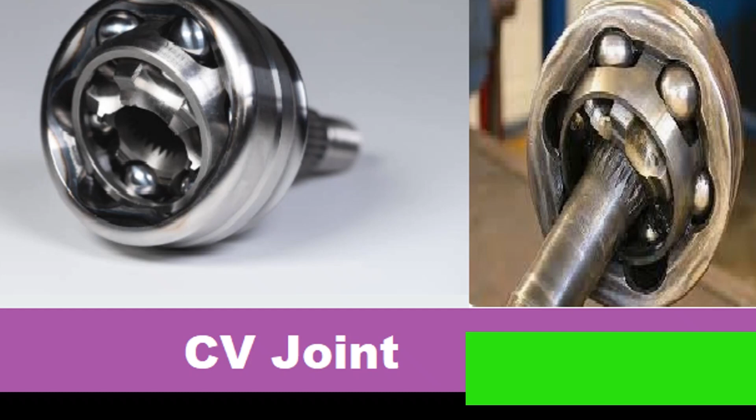Hello everyone and welcome to today's video where we discuss the symptoms of a worn CV joint and CV boot and how to replace them.

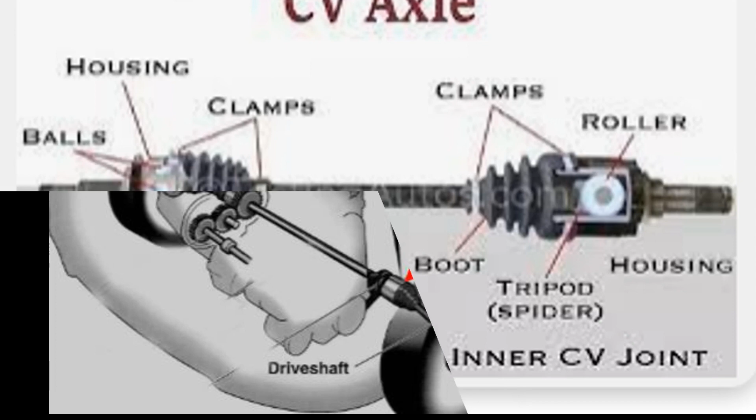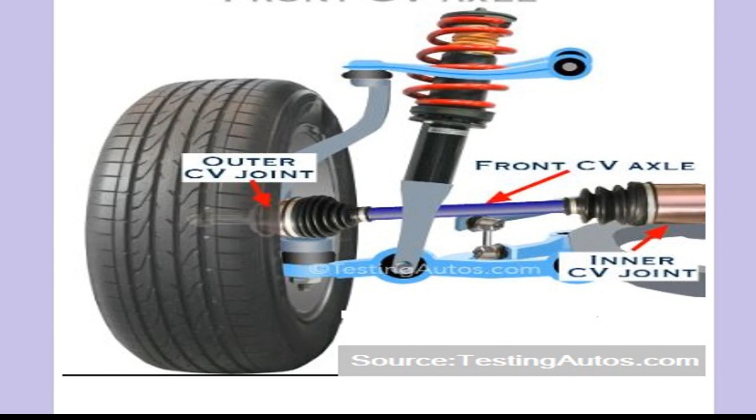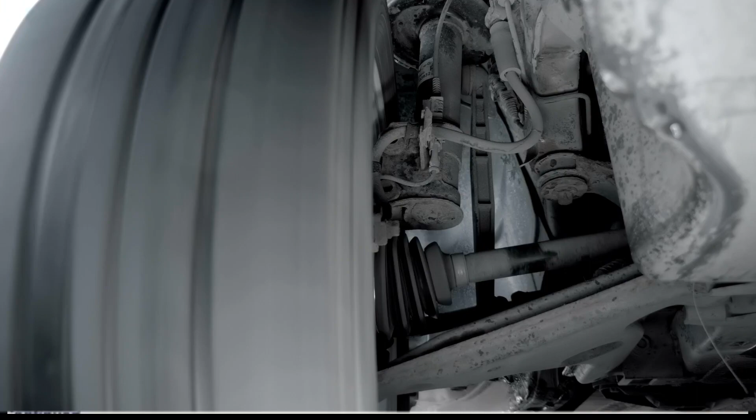What is a CV axle boot and how does it work? A CV axle is a component of front-wheel drive and all-wheel drive vehicles. Also known as half shafts, these axles transfer power from the transmission or transaxle to the wheels. An individual axle is made up of a short, solid metal shaft with a special joint, the constant velocity joint, at each end. These joints allow for all of the up, down, in, and out movement of an independent suspension.

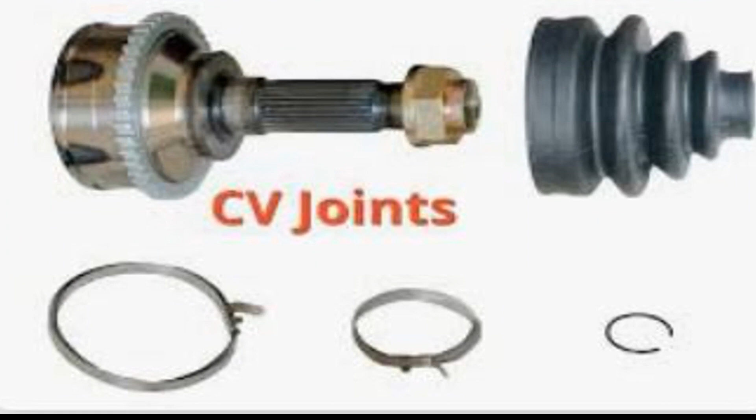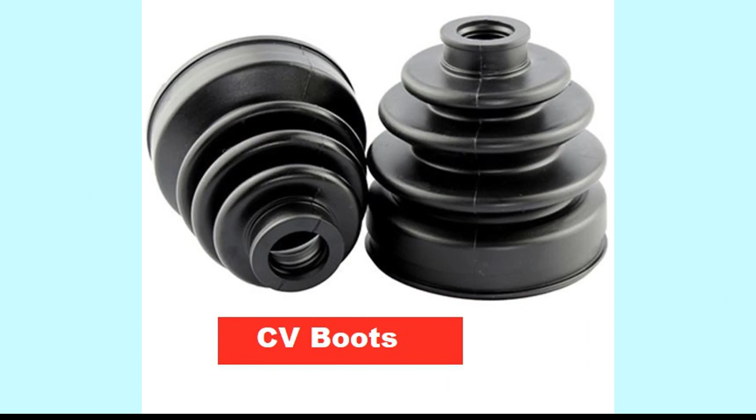What are the CV boot and CV joint? A CV boot is a protective cover that surrounds the constant velocity, CV, joint in a vehicle's drive shaft. It is made of a flexible rubber material that helps to protect the CV joint from dirt, debris, and other contaminants that could cause damage or premature wear.

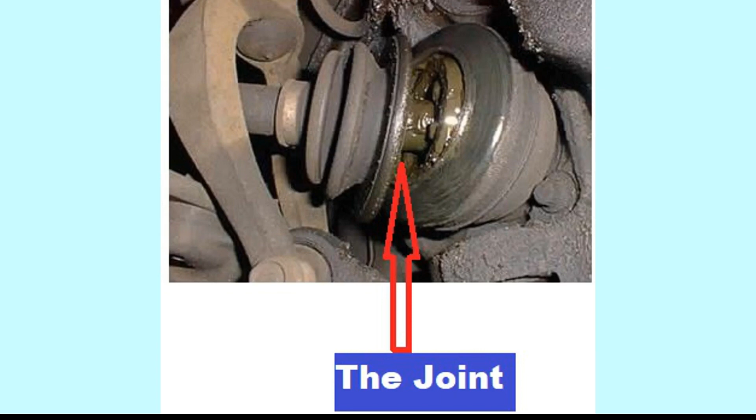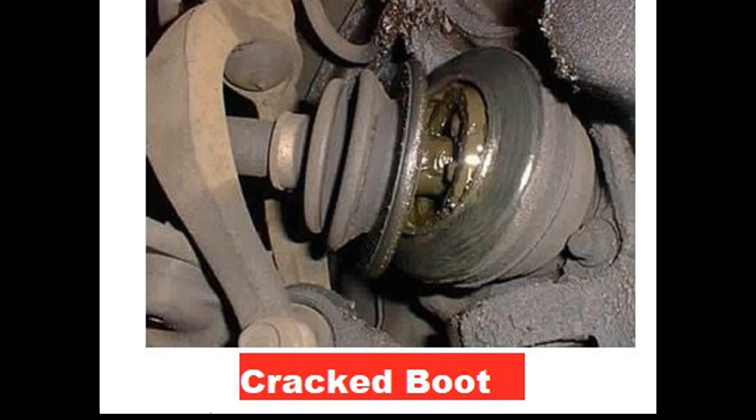The CV joint is responsible for transferring power from the transmission to the wheels, and the CV boot helps to ensure that it remains lubricated and protected, which helps to prolong its lifespan. If the CV boot becomes damaged or worn, it can lead to a failure of the CV joint, which can be expensive to repair. Now we will see the top 5 noise symptoms with a worn CV shaft.

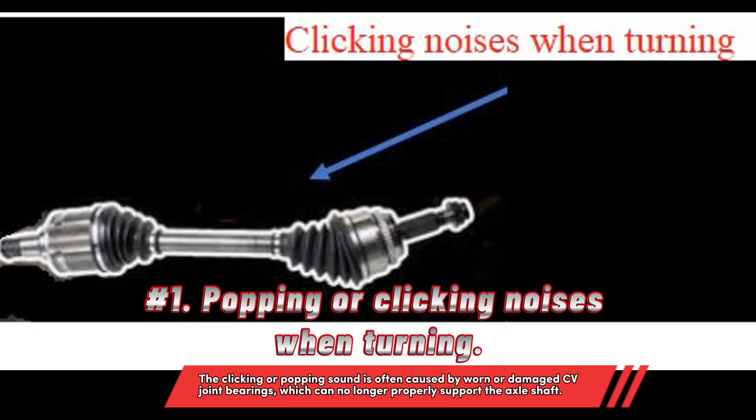1. Popping or clicking noises when turning. This indicates a worn or damaged outer CV joint. To verify this condition, place the vehicle in reverse, crank the steering wheel to one side and drive the vehicle backward in a circle. Check the rearview mirror first. If the noise gets louder, it confirms the diagnosis and the need for a new replacement CV shaft assembly.

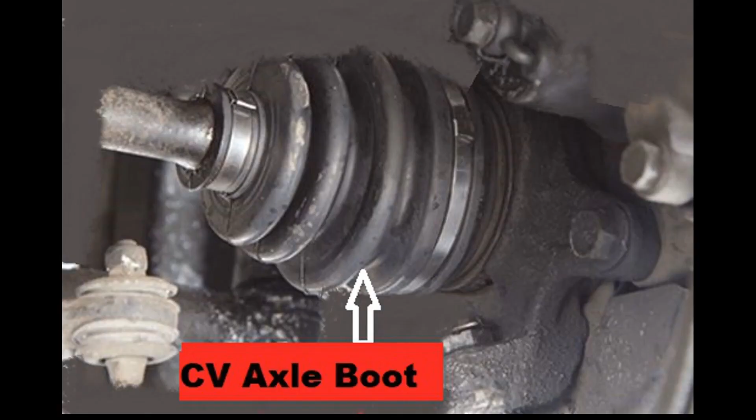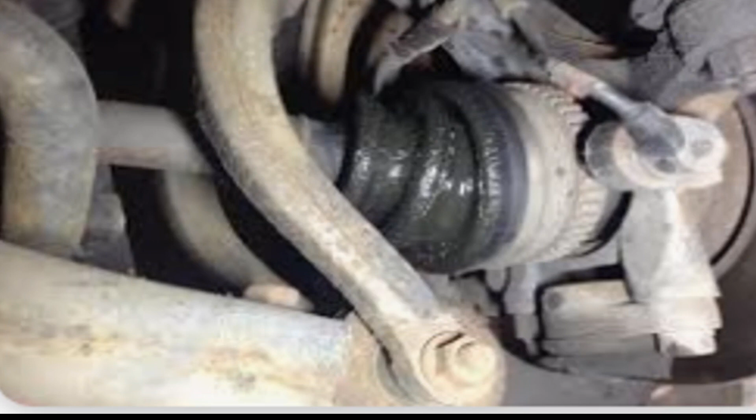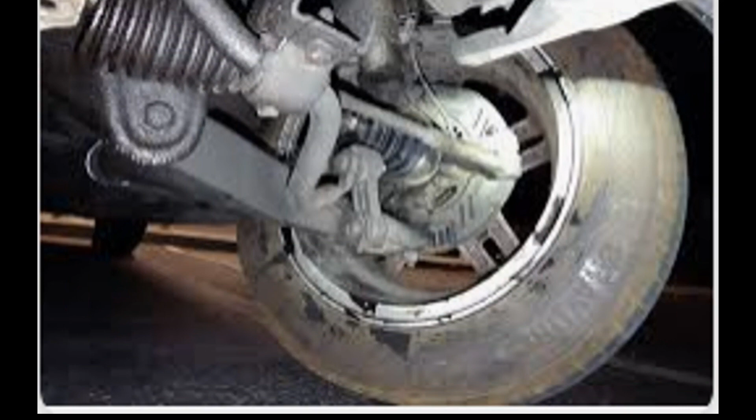2. A clunk when accelerating, decelerating, or when putting the transaxle into drive. The noise comes from excessive play in the inner joint on FWD applications, either inner or outer joints in a RWD independent suspension, or from the driveshaft CV joints or U-joint in a RWD or AWD powertrain. To verify the condition, back the vehicle up, alternately accelerating and decelerating while in reverse. If the clunk or shudder is more pronounced, it confirms a bad inner joint.

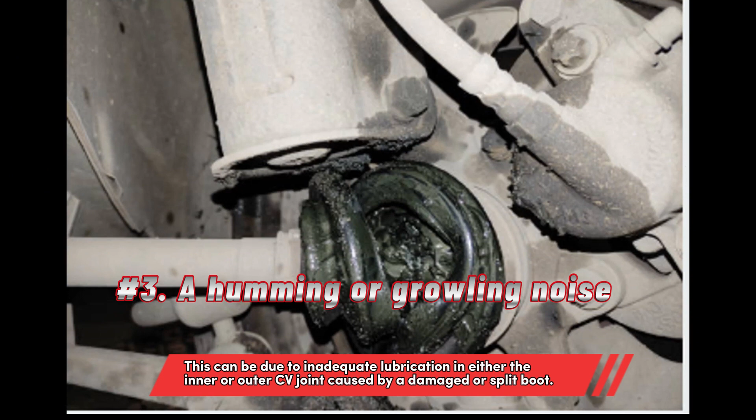3. A humming or growling noise. This can be due to inadequate lubrication in either the inner or outer CV joint caused by a damaged or split boot. However, this symptom is more often due to worn or damaged wheel bearings, a bad intermediate shaft bearing on equal-length half-shaft transaxles, or worn shaft bearings within the transaxle.

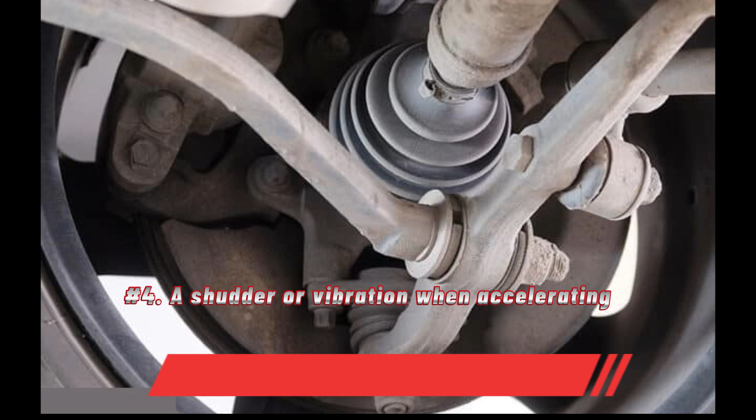4. A shudder or vibration when accelerating. This may be caused by play in the inboard or outboard joints, but the most likely cause is a worn inboard plunge joint. Similar vibrations can also be caused by a bad intermediate shaft bearing on transaxles with equal-length half-shafts, or by bad motor mounts on FWD vehicles with transverse-mounted engines.

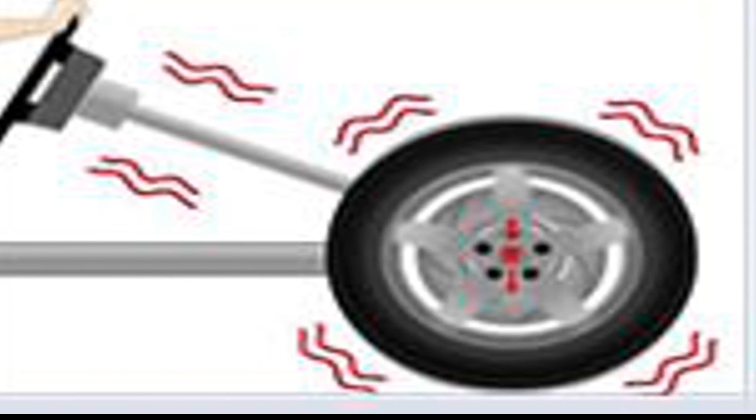5. A vibration that increases with speed. Note, this symptom is rarely caused by a failing CV joint. An out-of-balance tire or wheel, an out-of-round tire or wheel, or a bent rim are the more likely causes.

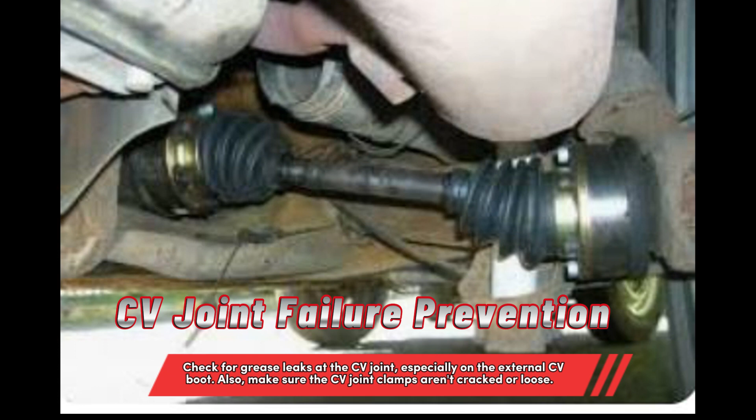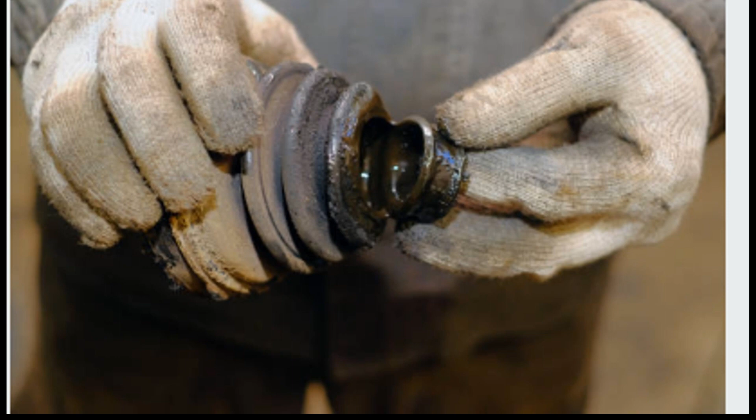CV joint failure prevention. Check for grease leaks at the CV joint, especially on the external CV boot. Also, make sure the CV joint clamps aren't cracked or loose. Visually examine your CV joints for wear, ripping, cracks, or other damage to the boot on a regular basis. Early detection of possible faults can save money on repairs and prevent more significant damage to the vehicle's driveshaft, wheels, or entire CV joint.

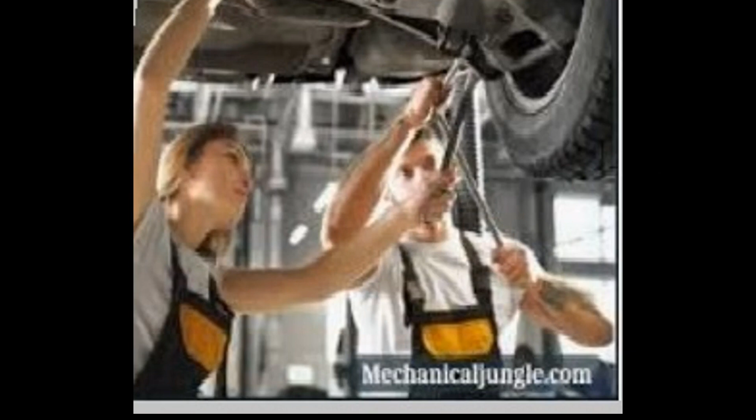How does a technician perform a CV axle boot replacement? CV axle boot replacement is not generally a simple procedure. The CV axle must first be removed from the vehicle. Because of this, and the fact that the cost of a new CV axle is not prohibitive, many technicians will recommend replacing the entire axle assembly rather than the boots.

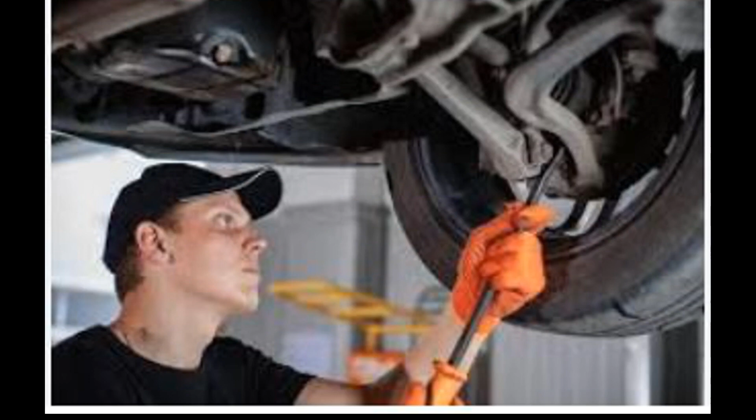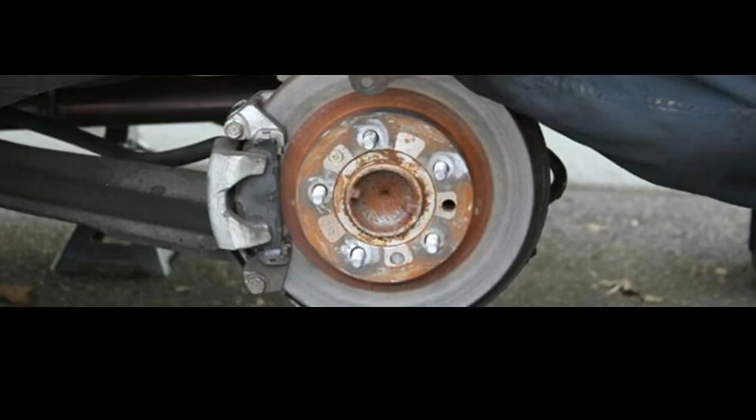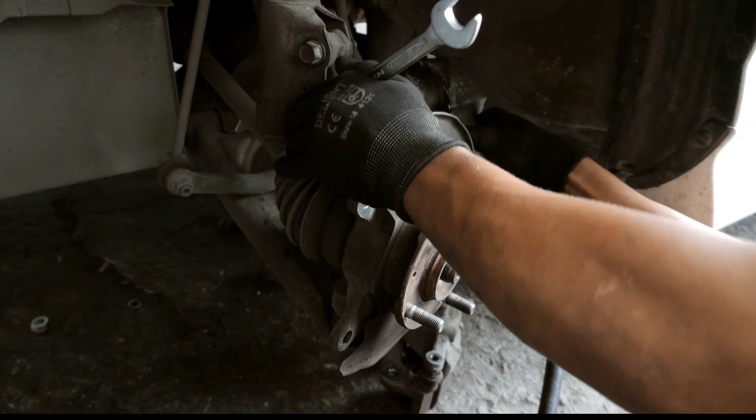If one or more of the boots are to be replaced, a mechanic will lift and support your vehicle off of the ground and remove the wheel and tire. While the procedure for replacing a CV axle boot differs from one make and model to the other, the mechanic will need to do the following. Number 1. Remove the large nut retaining the CV axle and carefully loosen the axle inside the wheel hub. Number 2. Set back any wiring that is in the way.

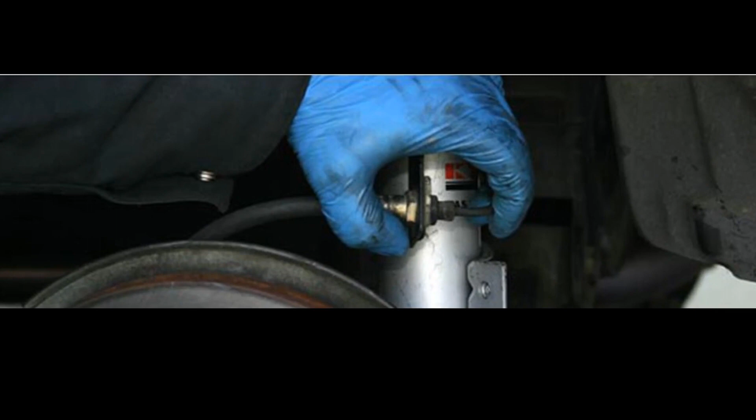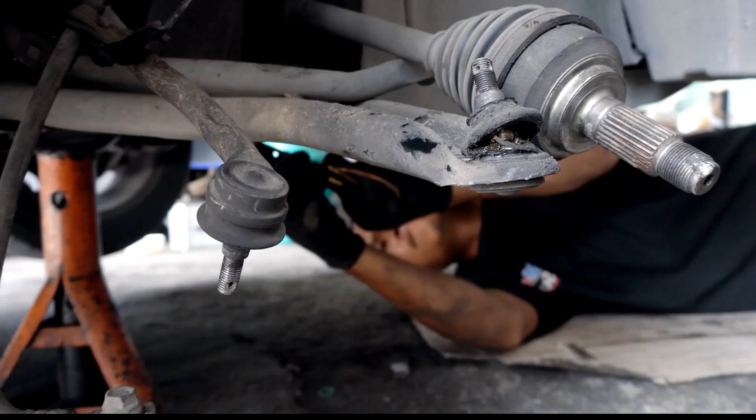Number 3. Remove bolts to detach the steering knuckle from the strut assembly. Number 4. In some cases, remove the tie rod end and lower control arm/ball joint from the steering knuckle. Number 5. Work the outer end of the axle shaft out of the steering knuckle. Number 6. Dislodge the CV axle from the transmission/transaxle or differential; it may be bolted or retained with an internal clip.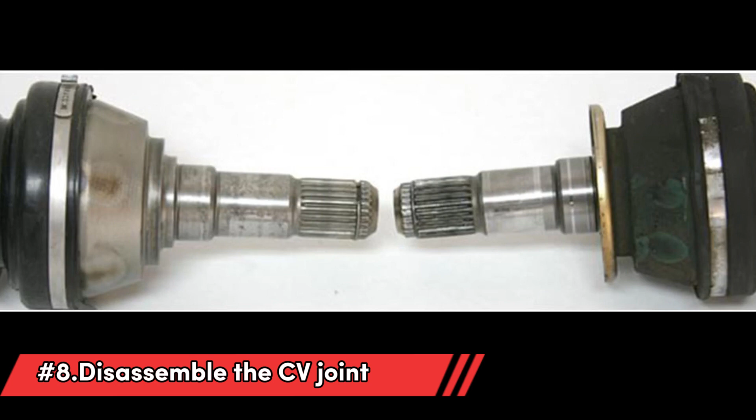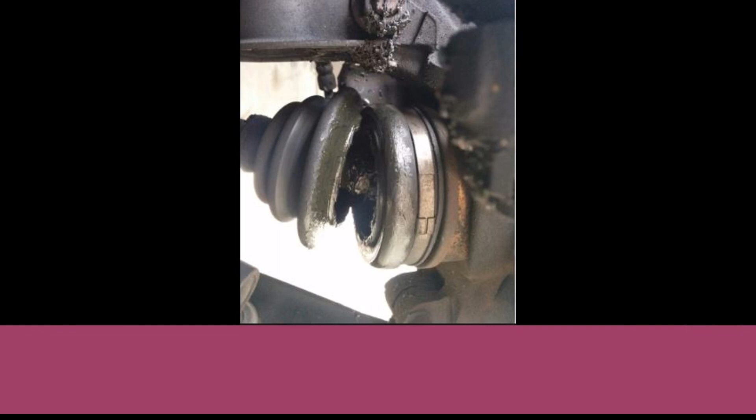Number 7. Remove the retainers that hold the boots to the axle. Number 8. Disassemble the CV joints. Number 9. Slide off the old boots and clean off the grease. If the damage is more extensive than a cracked boot and the CV joint is too worn to function, it will need to be replaced. CV joints are not repairable and must be replaced with a new part. Furthermore, because the CV joint is not offered separately, you may not be able to repair it alone and have to replace the entire CV joint or drive shaft.

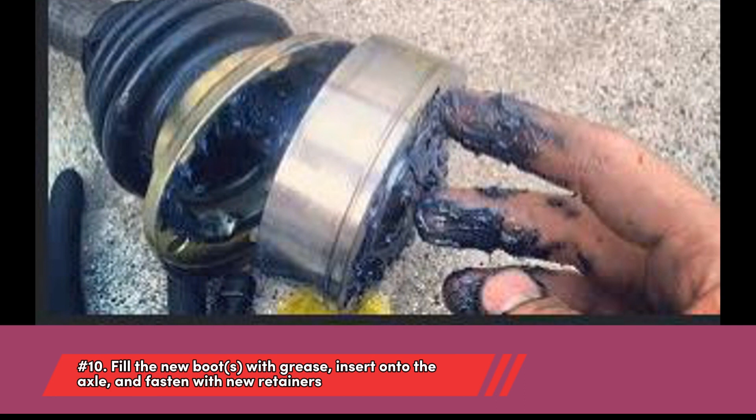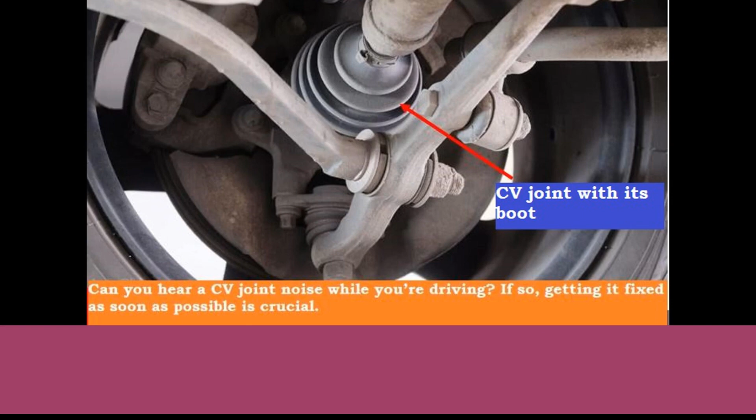Number 10. Fill the new boots with grease, insert onto the axle, and fasten with new retainers. Number 11. Reassemble the CV joints. Number 12. Insert the inner end of the new axle shaft into the transmission/transaxle or differential, taking care to avoid damaging the part or the retainer. Number 13. Insert the outer end of the shaft into the steering knuckle. Number 14. Reinstall all other components and torque the fasteners. Number 15. Check and top off the transmission fluid.

Thank you for watching this video about bad CV joints, cracked CV boots and how to replace them.